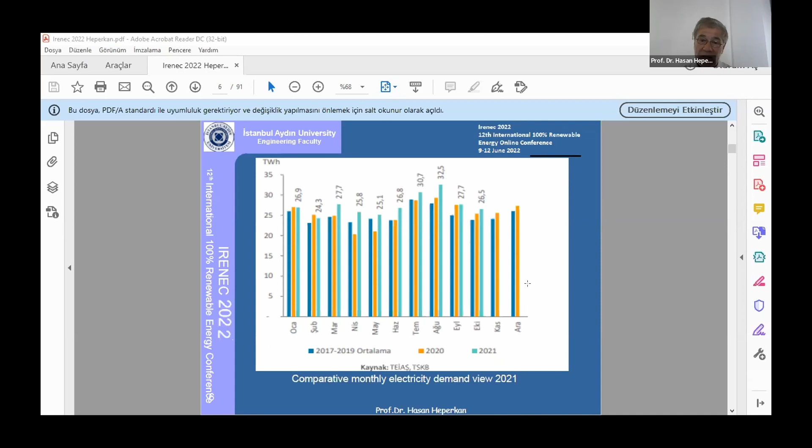And here we see a chart on the electricity demand view. The light blue is year 2021, and we can see that electricity use is becoming also more and more every year, which is also a good indication, because as you will see in my coming slides, electrification is an important part of switching or translating to renewable energies, and of course decarbonized cities and so on. So electrification is an important issue. In that respect, using more electricity gives a good trend for us.

Okay, so zero energy buildings now coming into the elements. Of course, this is not a new subject, but it has been mentioned in the energy performance of buildings directive before, so that the member states should be using, especially in new buildings and in public and private buildings, from year 2021. So we already passed that, and they are not performing bad, I would say. A zero energy building is a building that uses very little energy, and mostly from renewable sources produced on site or nearby energies.

So member states have been working towards this a lot, but they have not come to a very perfect point so far. Spain is one of the pioneers, let's say, of doing this, and they are about to include new nearly zero energy buildings in their legislation. Now, of course, the definition in the EPBD is very flexible. Therefore, the definition of a nearly zero energy building changes from state to state depending on geographical conditions and, of course, the energy structure in that country.

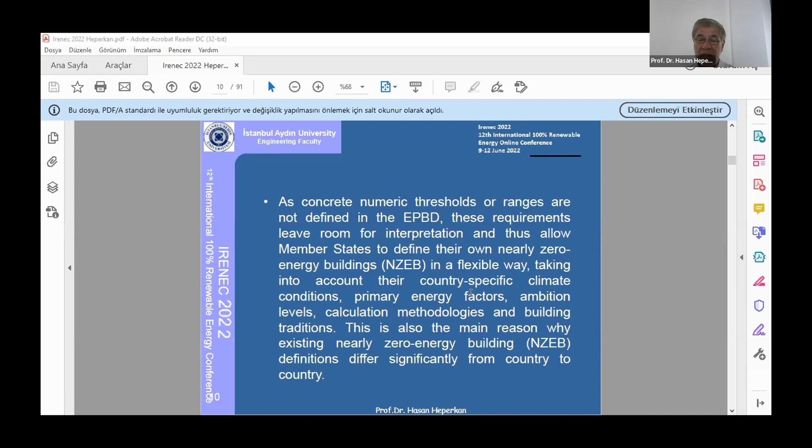That is why we see different definitions of nearly zero energy buildings from country to country. That is something we can't avoid. The European Union has also initiated projects regarding this. Zebra 2020 is one of these projects, and in this project, the European market is tracking nearly zero energy buildings, which they call a zero energy building radar graphic. And from this, you can somehow compare and follow what people are doing in these regions.

The Zebra project defines buildings in 4 levels. One is the net zero energy building. This is our basic goal, actually, or plus energy buildings. Plus energy buildings are buildings that actually generate all their energy need from renewables, and they have a surplus which they can sell to the grid or allow other users to benefit from this renewable source they are creating.

Then there are nearly zero energy buildings according to national definitions. That's what we have been talking about. And then we have buildings that achieve the requirements of 2012. 2012 is kind of like a starting point or a reference point, so we have to have a reference point to start with. So 2012 is a good date to start with. The next 2 categories are buildings that meet the requirements of 2012 and perform better, and the last segment is the buildings that just make the requirements.

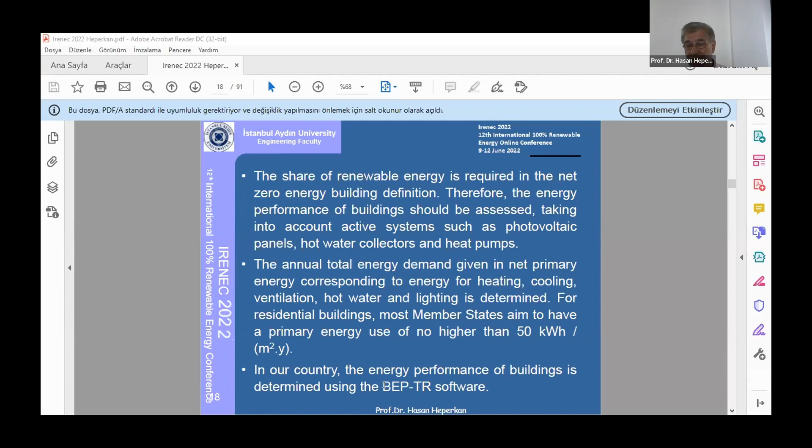Member states have targets for primary energy use around 50 kilowatt hours per square meter per year, which is not a very low number, actually, if you want to achieve net zero energy buildings. In Turkey, we already have software, which I will mention at the end of my presentation, BEP-TR. Technological solutions are already available related to thermal insulation, triple glazing windows, energy efficient heating, cooling, lighting, and appliances for integrating renewables. So in terms of technology and market, we are there.

The main problem is they may be a little expensive at the moment, but that expensiveness is recovering very quickly, especially with the rising energy prices at the moment.

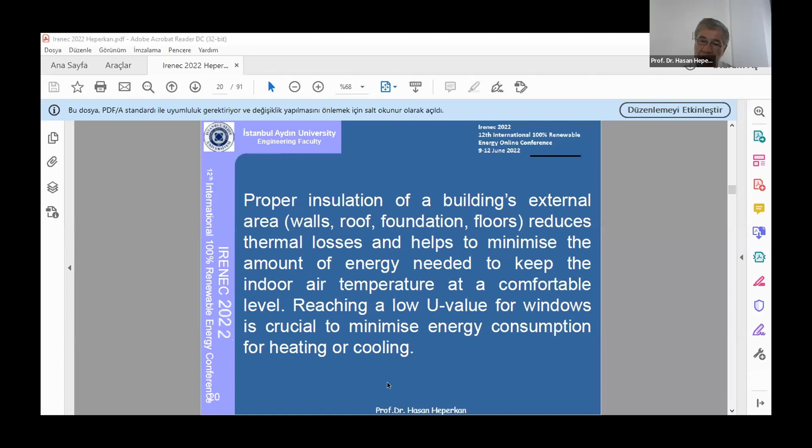So we start from proper insulation, because to achieve a zero energy building, first you must cut down on its requirements and its usage of energy. So the best way of doing this is to insulate it. The smaller the heat losses and gains of the building, the better a chance you have of switching to a zero energy building.

So let us talk a little bit about the climate change actions that have been going on recently. Professor, we have 15 minutes. Yes, I will, okay, speed up. Don't worry, okay.

In year 2015, the United Nations Climate Change Conference took place. I take that as a starting point because that is the first COP meeting where global warming was first made so important, along with the emission of carbon dioxide, especially related to energy production.

The latest, COP26, was achieved in 2021 last year in Glasgow. I wanted to take a minute on that because there were some points made there, and the way we are going right now, the target is a rise of 2.7 degrees if we don't do anything.

If we do achieve some of the commitments that states have made, reaching them by year 2030, this would be 2.4 degrees. 2.4 is still a high number, and 2.1 if the targets are implemented.

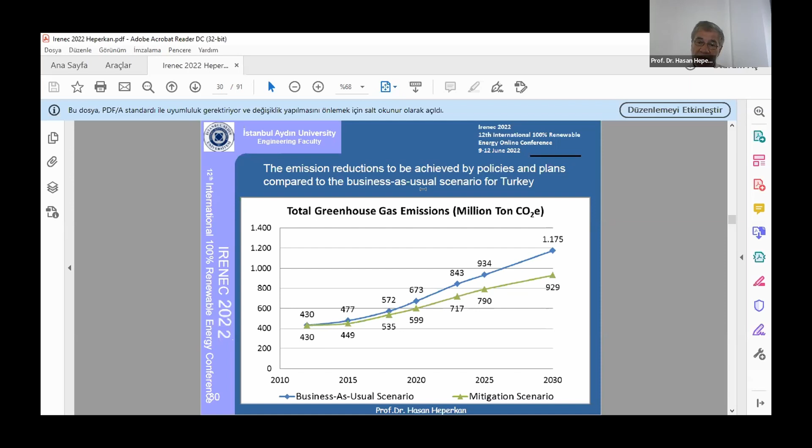This is what we have promised to do. The Green Deal, of course—Europe has set forward their goals. One of them is the European Green Deal. We are all aware of this, so I can pass this part quickly. The two documents define the European Union's expectations and give clues to end the COVID-19 era.

What are the basic issues? Hydrogen and renewable energy occupy an important place here. And here are three statements that I have summarized from the Green Deal.

We must reduce energy demands of buildings, use efficient technological solutions for buildings, and integrate renewable resources. How do we do that?

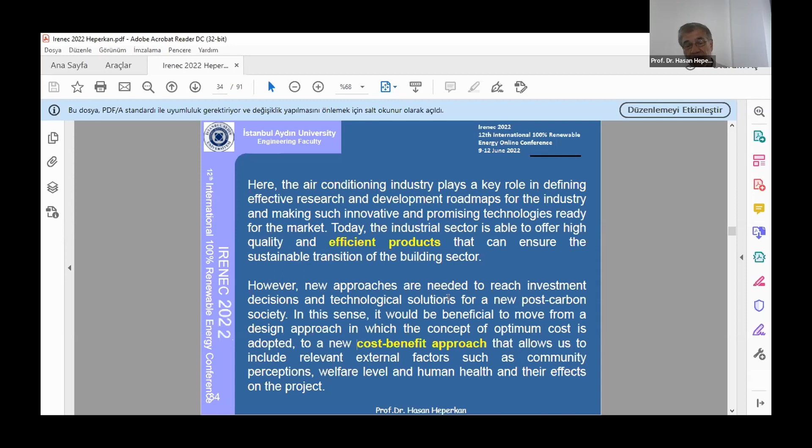We must use efficient products, of course, and another very important issue is the cost-benefit approach. We have been using an optimum cost analysis up till now, but this is not enough. We must also include how society looks at these measures and the transition, which gives us the cost-benefit approach in terms of strategies.

The new Energy Performance of Buildings Directive has also been looking at these issues. Comfort and health are two new concepts that have been introduced into the directive, and the smart readiness indicator is the control and electrification part of the directive.

What is a cost-benefit analysis? We must also look at the external effects in the evaluation, like the economic dimension, the financial analysis, and the social perspective of society, not just concentrate ourselves on buildings and technologies.

There has been a proposal in the last month of last year to revise the directive to bring these more into the picture, social action and so on.

I want to emphasize these last three things: what must we do in this proposal? National building renovation plans should be taken into account, because we must also take care of existing buildings. So energy performance certificates should be issued, and renovation passports should be. These are new concepts proposed for the directive. And during modernization, we must use energy efficient systems.

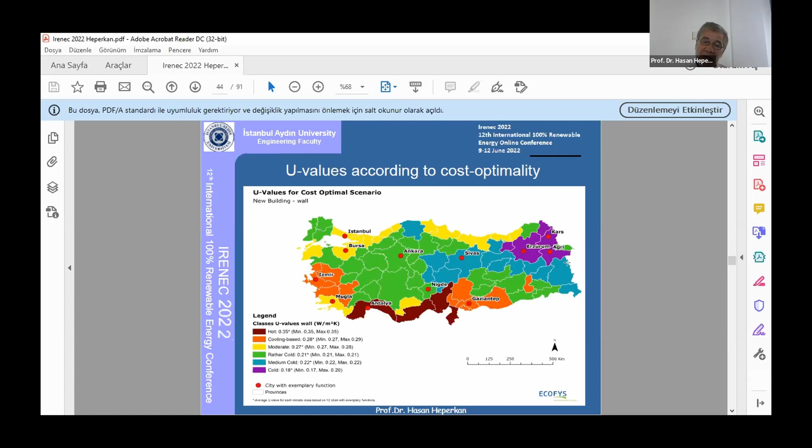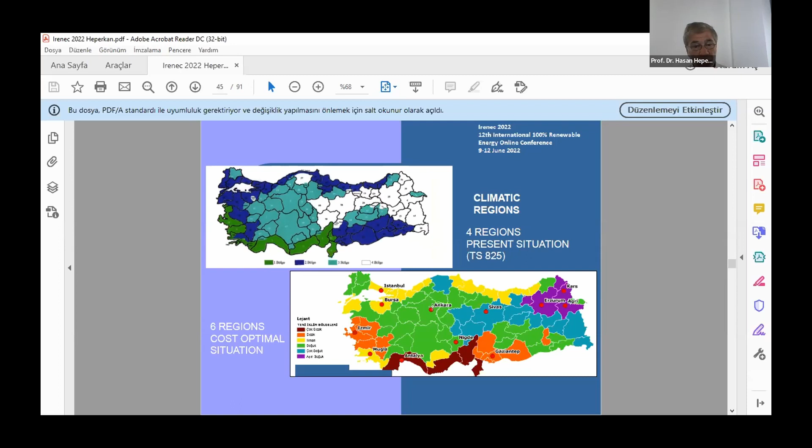I'm running out of time, I have 5 more minutes, so I will pass this part. There was a project by İZODER 5-6 years ago to establish the climate zones of Turkey, which is defined in the national standard at the moment as 4 climate regions, but the cost optimal analysis tells us these regions must be increased to 6. That is a comparison of the old and new proposed climate regions in Turkey, and accordingly, the new values have to be redefined for these regions.

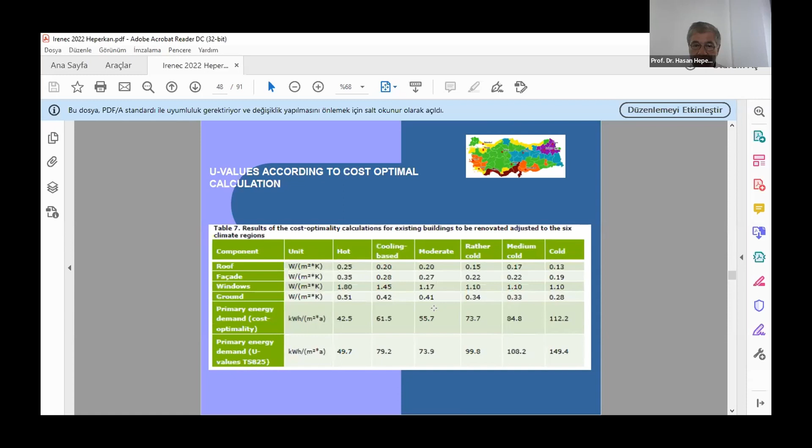Now let us come back to renewable energy and electrification. This is an important part of the transition to decarbonized cities. If we look at the latest records, although the COVID era has had negative aspects on our society, we're doing fairly well on renewable electricity capacity building in this region. The Russian-Ukraine war has actually stimulated these activities, because countries, especially European countries, are now trying to reduce their dependence on Russian supplies.

I think the pre-crisis policies led to faster growth now, and as I've mentioned, the European Union now does not want to depend on Russian natural gas anymore. I will pass these slides.

How is Turkey doing? According to 3 scenarios, if we can achieve the best one, by year 2028 we can actually change the picture completely, replacing the percentage of fossil fuels with the percentage of renewables.

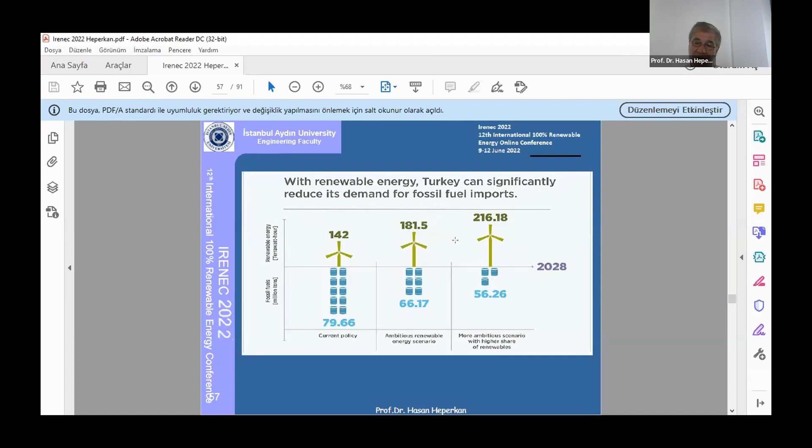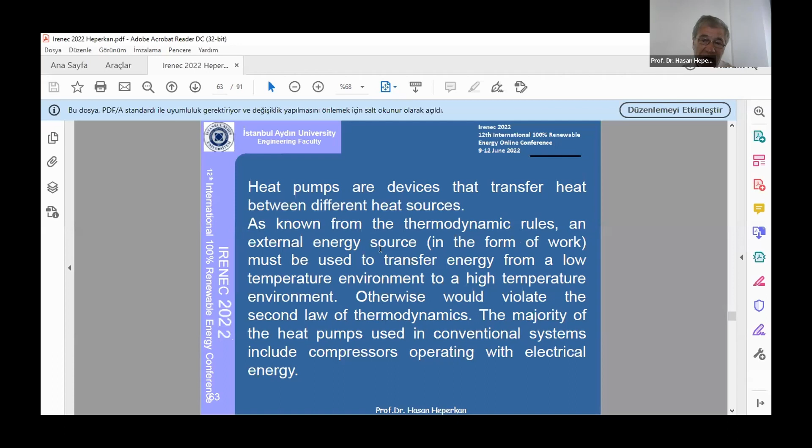I will come to heat pumps now. I know I'm running out of time, so I'd like to share these last slides with you: zero energy buildings and heat pumps. Heat pumps are devices that transfer heat from different sources. There are 3 types, as we know: one from the earth, ground source heat pumps, one from water, and also from air. This is important, I wanted to emphasize this, because the renovation of buildings depends on heat pumps, I would say. Otherwise, we cannot achieve the transition.

There was a drawback related to the use of heat pumps, because they were not considered to be renewable, since they used electricity and also fossil fuel reserves for running the pumps and the compressors. However...

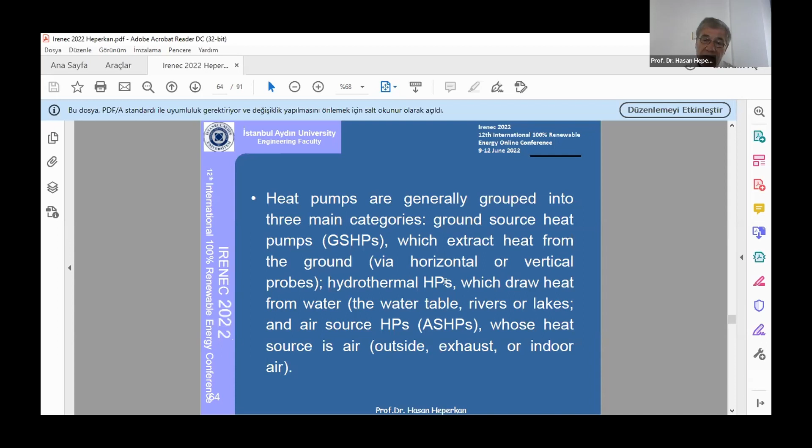The renewable energy resources directive has changed this issue, and now the part of the heat pump's energy that comes from sources like the ground, water, or air is counted as renewable energy. That is a drastic change, I would say, a turning point for being able to achieve the transition.

In the last 5 minutes, I would like to talk about smart technologies and digitalization. Modern economies, of course, cannot do without ICT technologies, information and communication technologies. Internet of Things is an important part of this structure, which of course introduces other problems like cybersecurity issues, but we will be able to overcome these drawbacks.

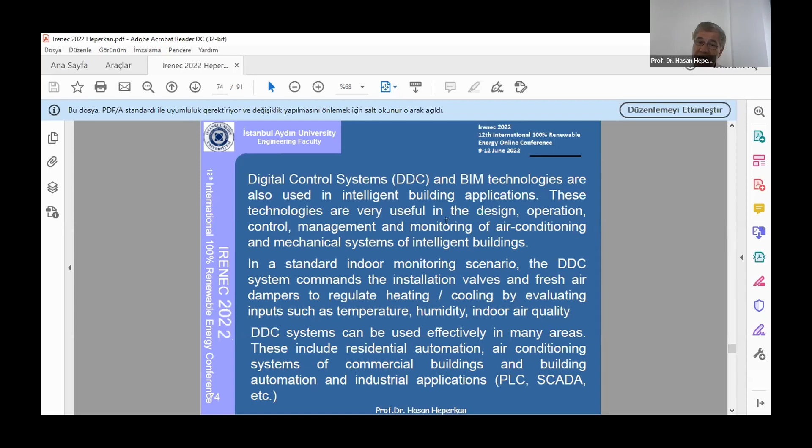Digitalization is not used in heating and cooling that much at the moment, but the technologies are enabling the use of these new digitalization technologies in products. DDC systems and building information modelling technologies are important here. They depend on digitalization and the achievement of the big data required for the management of these systems.

Here is a sample DDC system that we can use in a residential building. You can use the system to control the lighting, the doors and gates, sprinklers, home entertainment, all sorts of functions of a residential home.

How do we do this? Well, we have 4 stages. We have sensors, field elements, integration and management.

First, we measure the quantities using sensors like thermometers, humidity sensors, CO2 sensors, and so on.

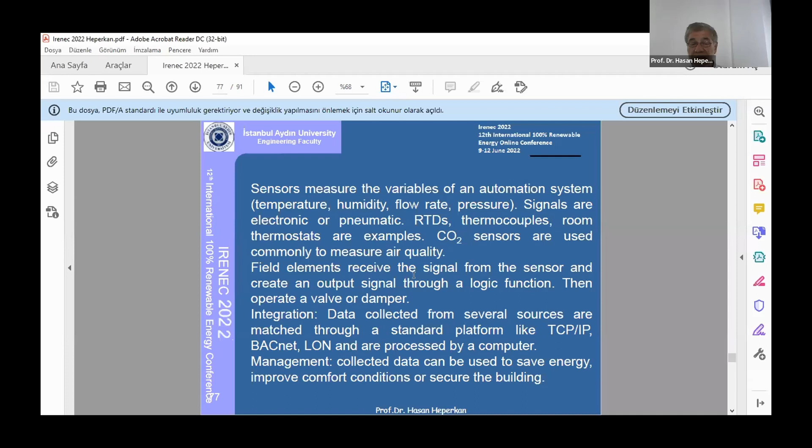Then these signals are converted into signals with the logic functions, and then they operate valves and dampers to control the system, and they are integrated through a BACnet or LON system and processed by the computer, and then this data is managed to save energy and increase the comfort conditions and the security of the building.

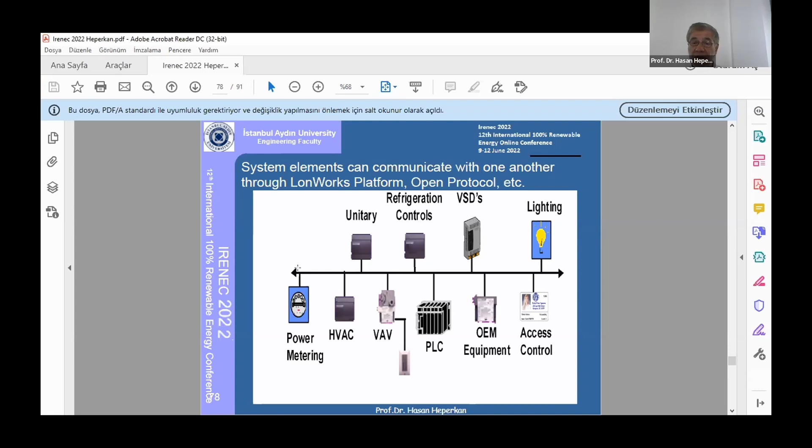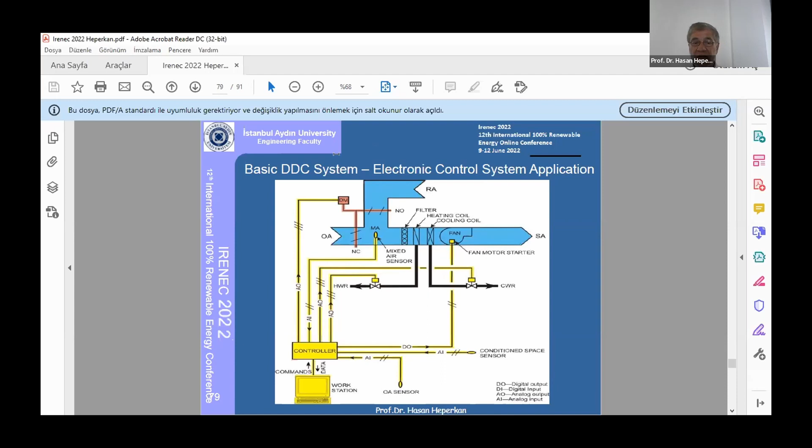So you have these elements that can communicate among themselves, and this is an example of an electronic control system that uses the basic DDC system.

Okay, and I'm about to finish. I want to talk about, I did this last year also, the Y generation, because the Y generation is actually dominating the lives, the technology especially, and therefore their way of looking at things is important to understand what's going on.

And the freedom of choice, of course, and to be free is their basic goal. So they want to be mobile. They don't want to work in offices all the time. They don't want to work at home either. They want to be mobile.

They want to do everything, but in that meantime, they would like to also do their professional businesses. Metaverse, for example, is an endpoint to this because I'm sure you are aware of the concept, the metaverse. You do your social life and also your business during your internet games. You can go to give a break in your internet game and then go to a concert with friends. You can send them tickets. You can do your business. So you see, everything is being done in a metaverse world.

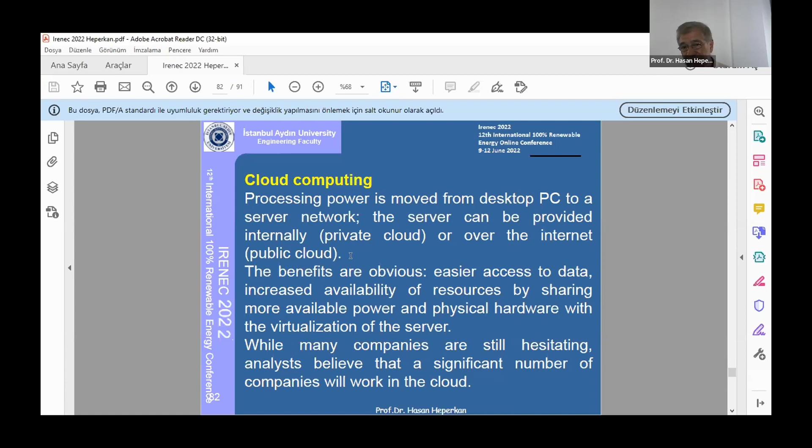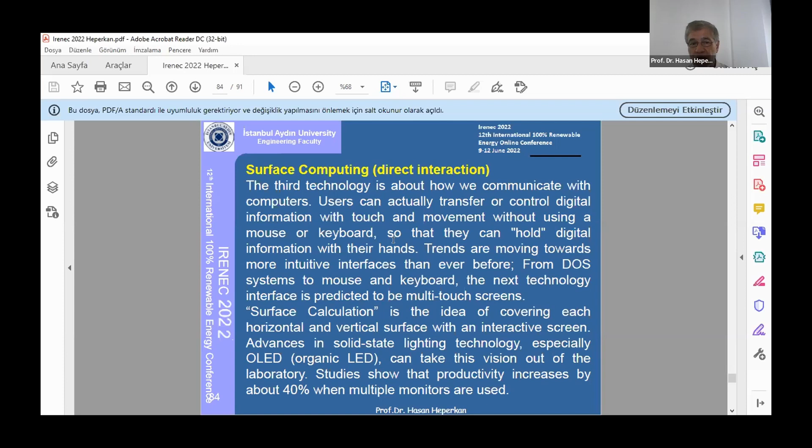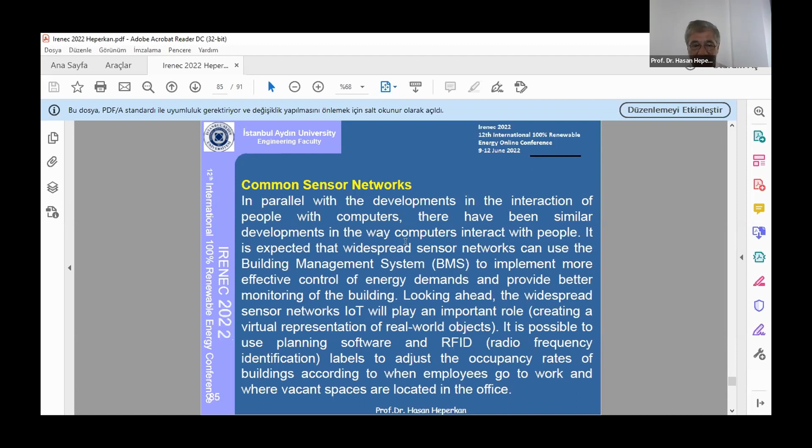Surface computing is the technology that gives your interaction with the computer. You don't want to use mouses anymore. You don't want to use the computer in that way. And then, of course, to do this, you must have a network of sensors and, of course, a very powerful internet system.

And one more minute, and I'm finishing up. The energy performance software that we have developed for Turkey. There are different softwares that are commonly used, like the Hub software, Energy Plus, BEP and ISODER software are two softwares that are used in Turkey a lot.

Of course, the BEP software is a software that is not for energy performance calculations or for comparison. It is mainly to be able to issue the building energy certificate that I have mentioned, which is now going into the European Energy Performance Directive. So in that respect, I put this especially there because at this point, we are actually ahead of the European Union. They are considering this now and putting it in the directive.

This software is already in the legislature in Turkey. So I just wanted to say this because this is something I'm proud of. We're not doing that bad.

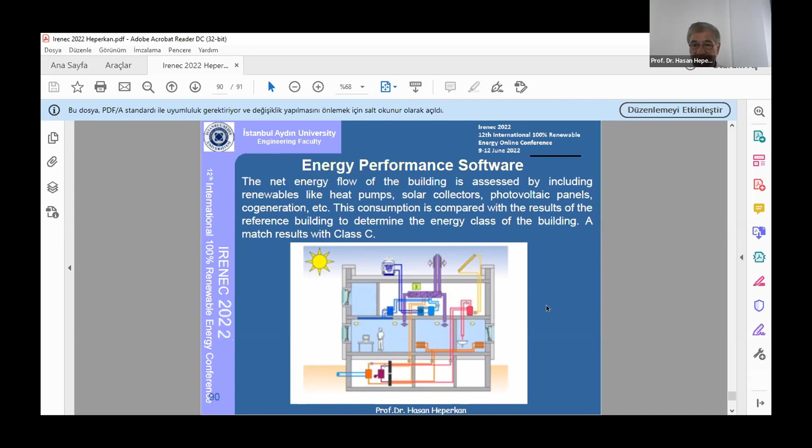Thank you very much. I rushed through my slides, but I think I took only an extra 5 minutes. Sorry for that. That's okay.